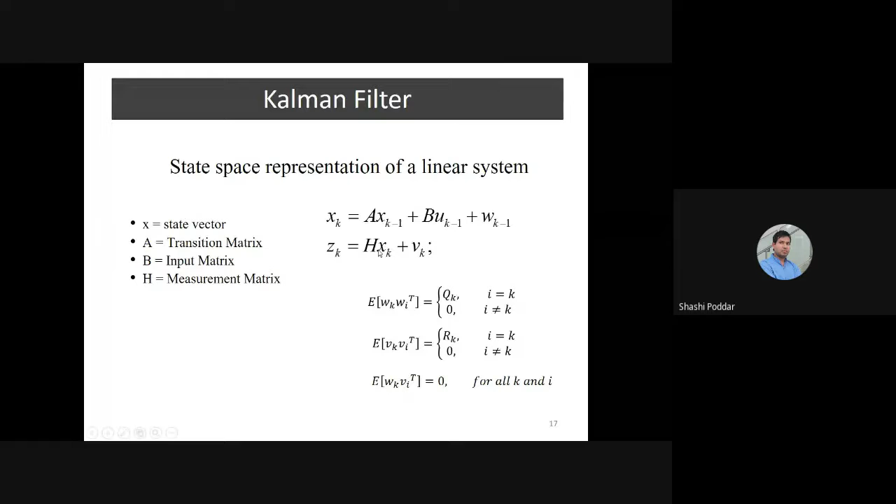So now let me explain the algorithm first. If suppose the error at any time instant can be represented as Xk minus Xk cap, then the error covariance of it can be represented as Pk, which is equal to the expectation of Xk minus Xk cap into Xk minus Xk cap transpose, and which is propagated in time to provide us Xk cap equal to Xk cap minus plus Kk times Zk minus Hk Xk. Zk minus Hk Xk is basically called the innovation part, or the error between the measurement, where Zk is the measurement, minus H times Xk cap minus.

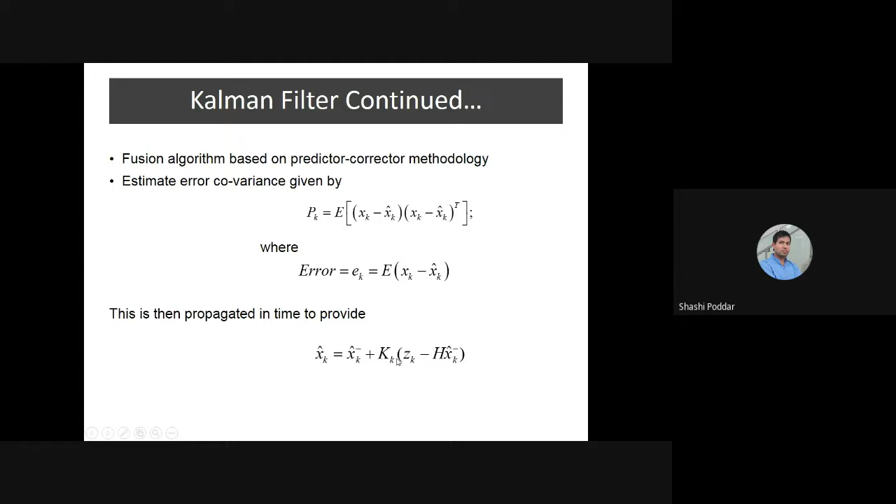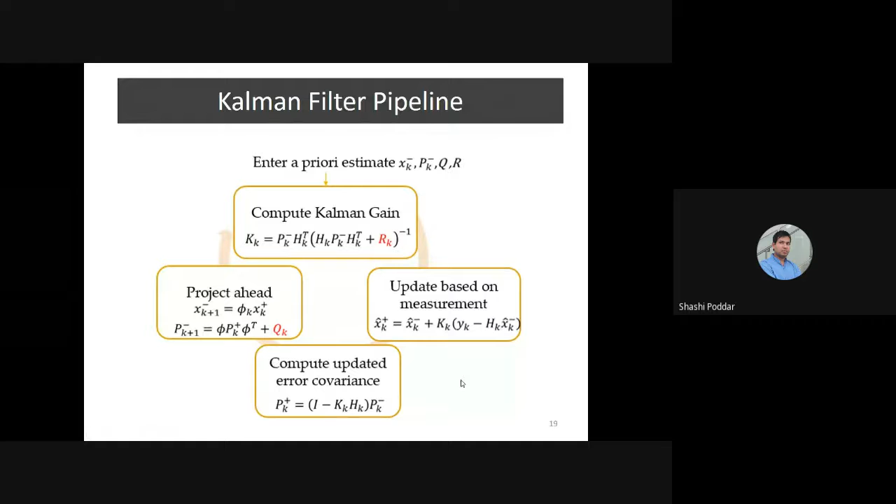This is the propagated part, this is the measurement part. Once we take an error of both of them, we keep adding errors at each time. The whole Kalman filter equations can be explained in 4 steps: first, project ahead, where we estimate the next time instant; then compute Kalman gain; then update the measurement; then compute the error covariance at each time instant. This keeps running at every time instant, giving a better estimate of any state. This is the estimation framework for a UAV or vehicle's attitude parameters via Euler angles.

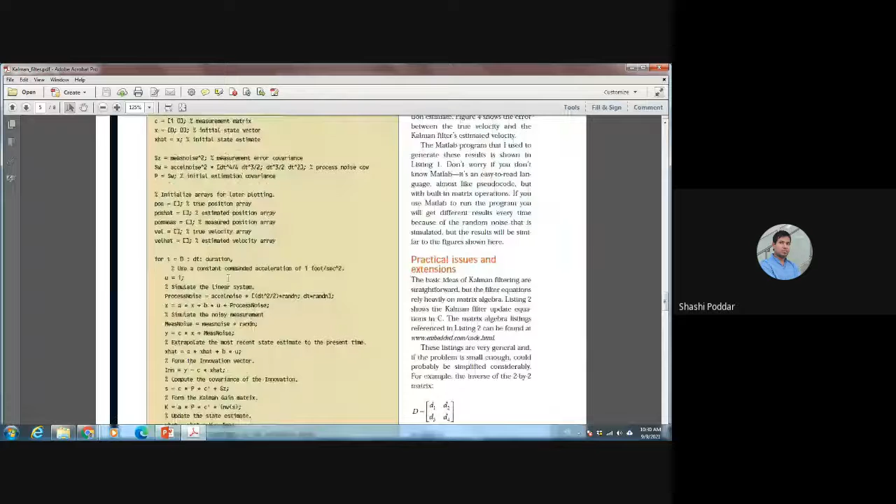Before going ahead, I'll introduce a small example of how the Kalman filter works for a position estimation system. I'll use this tutorial presentation by Dr. Dan Simon, who has written a very good book on Kalman filters.

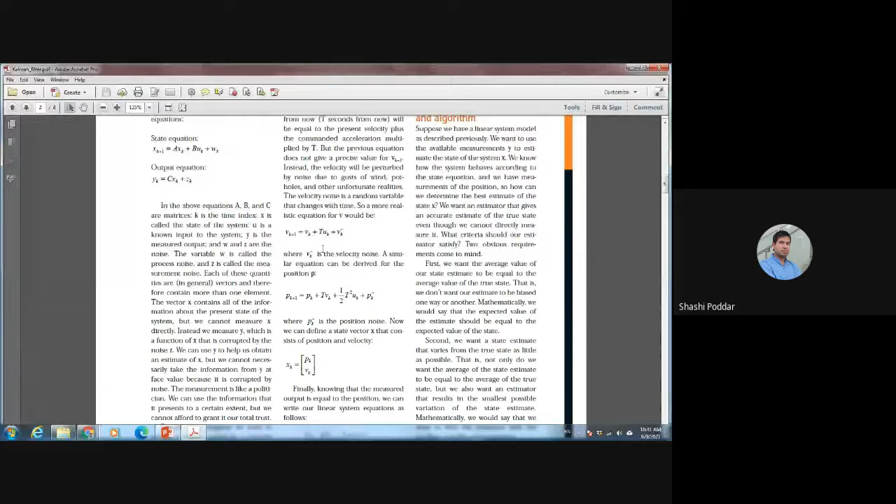He represents the system using a state equation and an output equation. Considering the velocity of an object, Vk+1 equals Vk plus t times uk, where uk is the acceleration and t is the time, or delta time. So acceleration times delta t is basically the velocity, and Vk tilde is noise. Similarly, position Pk+1 equals Pk plus delta t times Vk, where Vk is the velocity, plus half... this is the general physics equation of position and velocity.

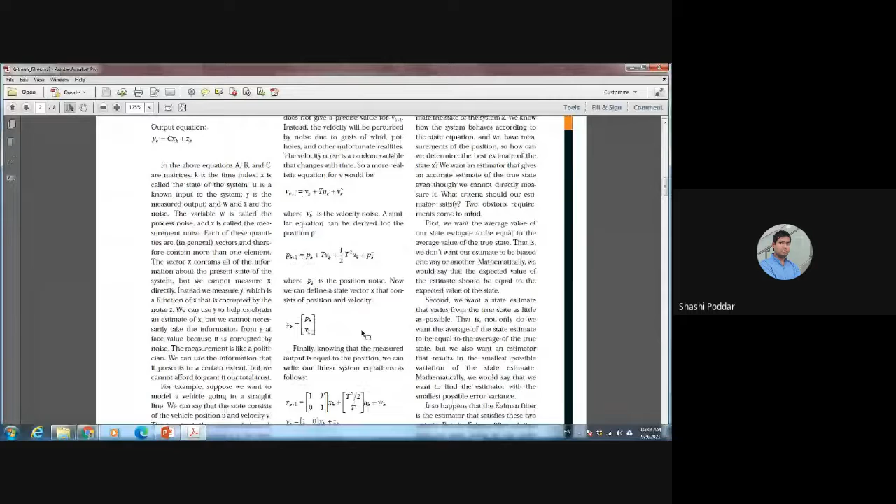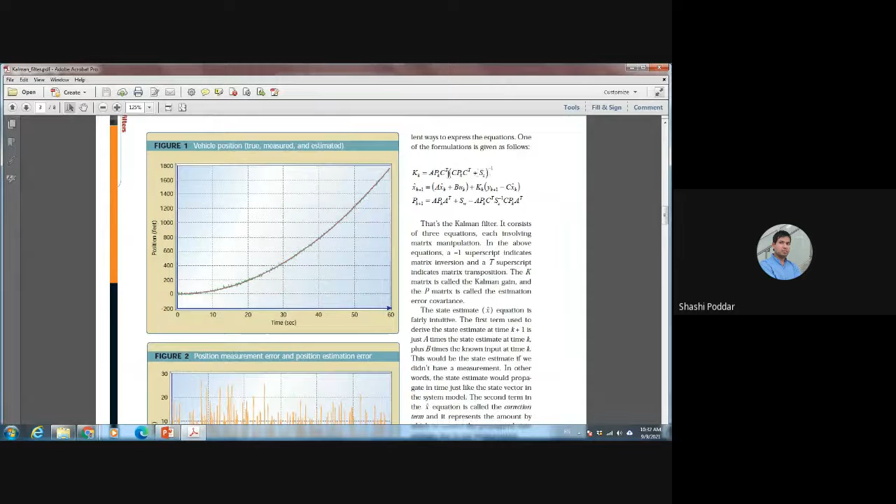Now if we apply the Kalman filter on this equation - the kk, xk+1, and pk+1 equations - we can keep estimating the position at every time instant.

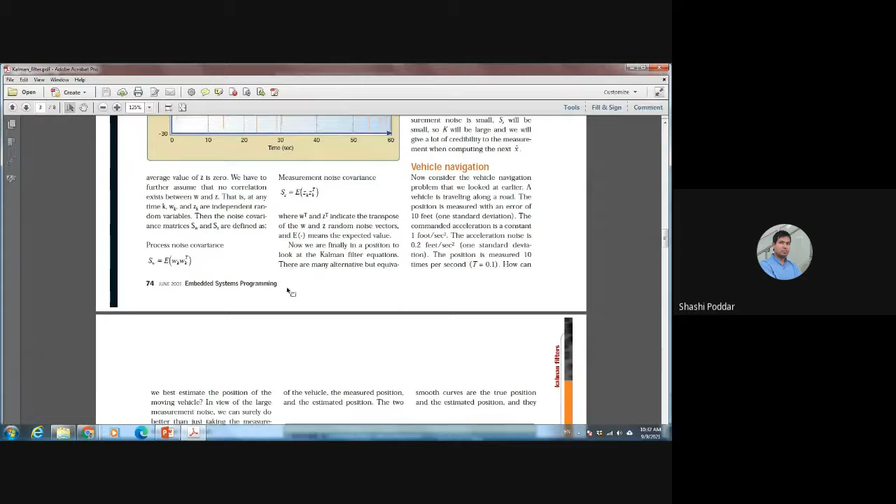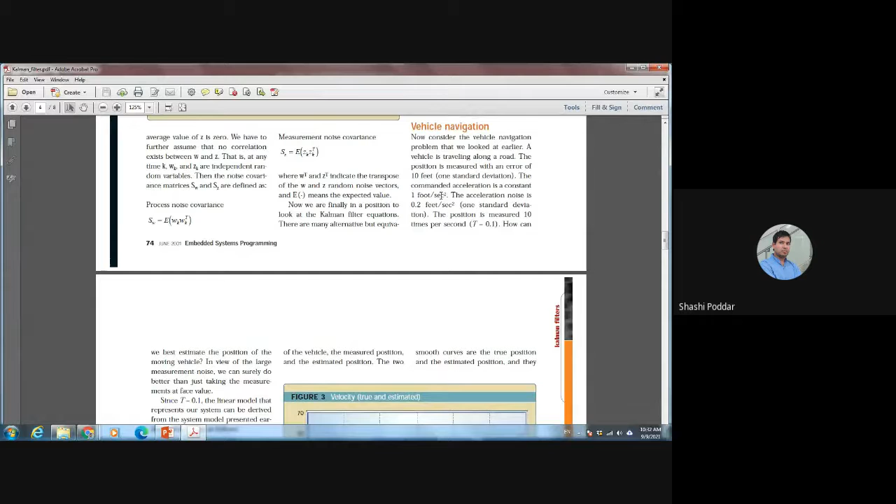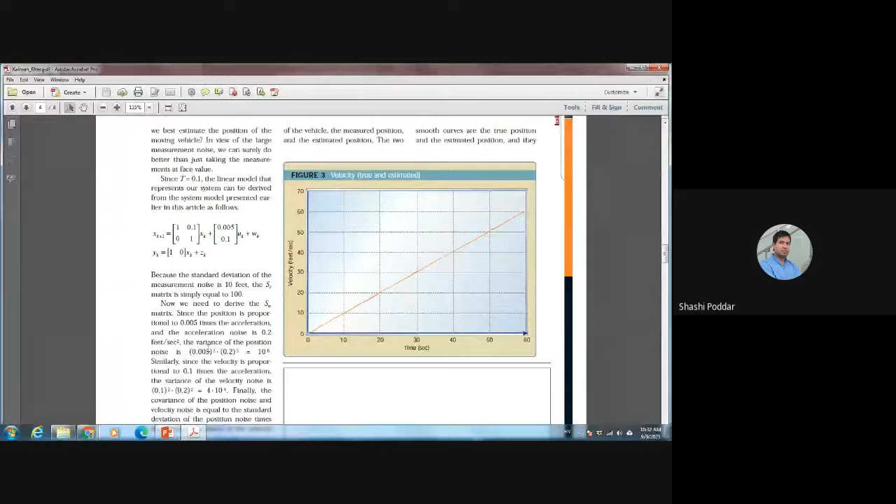This whole presentation or tutorial is available on the website. If we feed exact data, such as acceleration of 1 foot per second squared, acceleration noise of 0.2, and position values, we can get a real equation and simulate the system. Professor Dan Simon has provided the MATLAB equations for simulating this, and we can see the error as we change the acceleration noise or measurement noise parameters, and observe how a Kalman filter works.

Currently this system has been defined for a linear system. If we have a nonlinear system, we have what are called extended Kalman filters or unscented Kalman filters - but we won't go into much detail on that.

Now let's come back to the state estimation of a UAV or unmanned vehicle. Here, phi dot, theta dot, and psi dot are the orientation angles' derivatives, and the biases in all three are represented as BP, BQ, and BR. The derivative of the biases is represented as noise in this, and these equations are taken from Dynamics of Flight Stability and Control by Etkin and Reid.

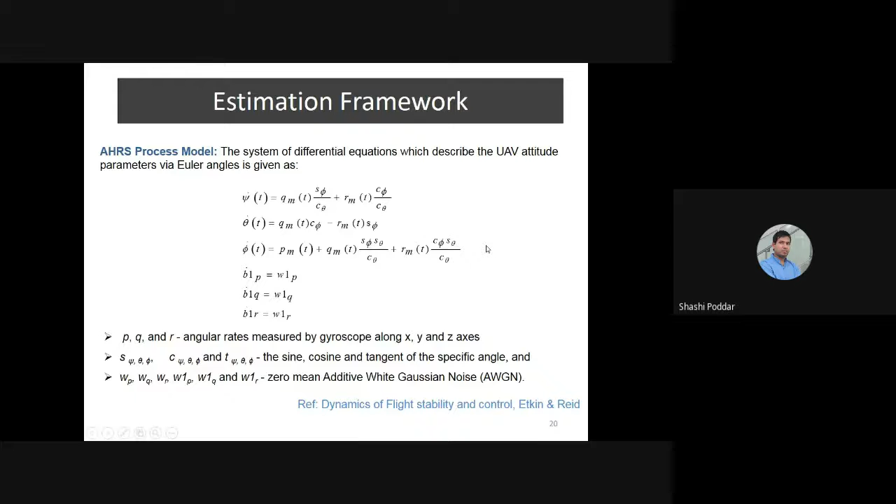Similarly, a measurement model is defined in this way, where we have the output from the accelerometer in all three axes, represented like this. So once we use the equations for the process model and measurement model for a simple position estimation system...

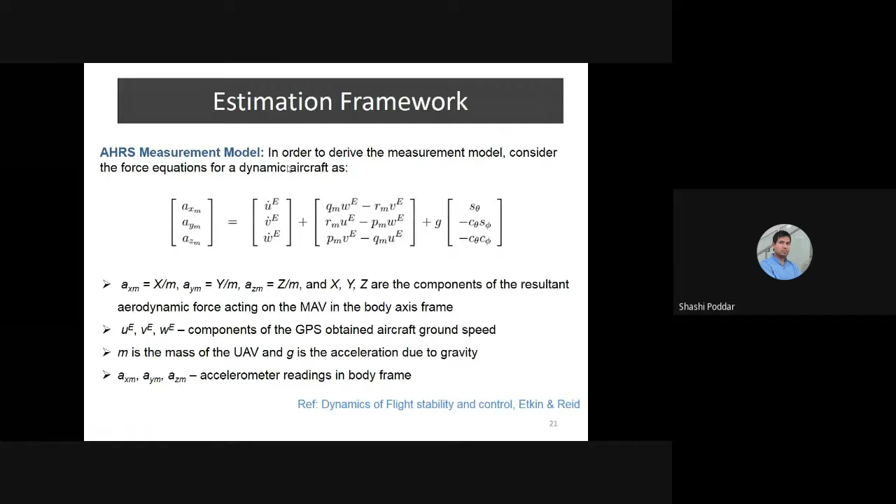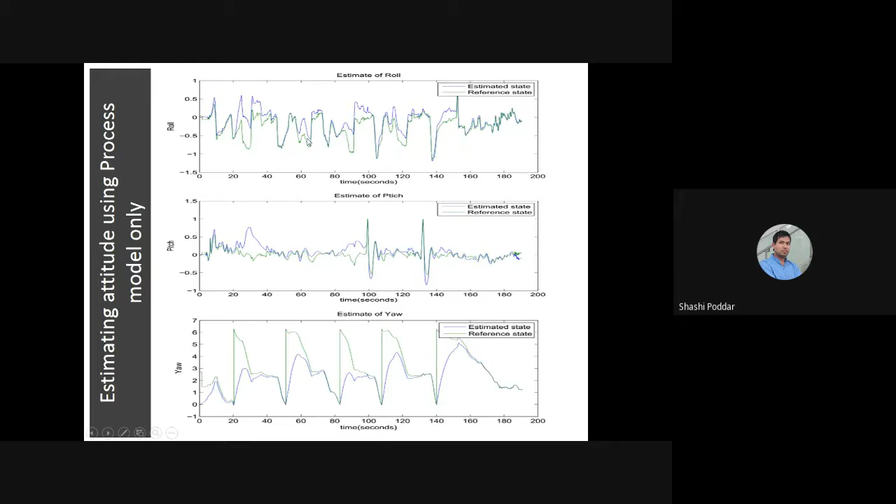Now what happens if we estimate an attitude using the process model alone? You can see that the reference, shown in green, and the estimated, shown in blue, are a little off - they're not completely following each other for roll, pitch, and yaw. Similarly, if we use the measurement model alone, the estimated and reference show a lot of noise.

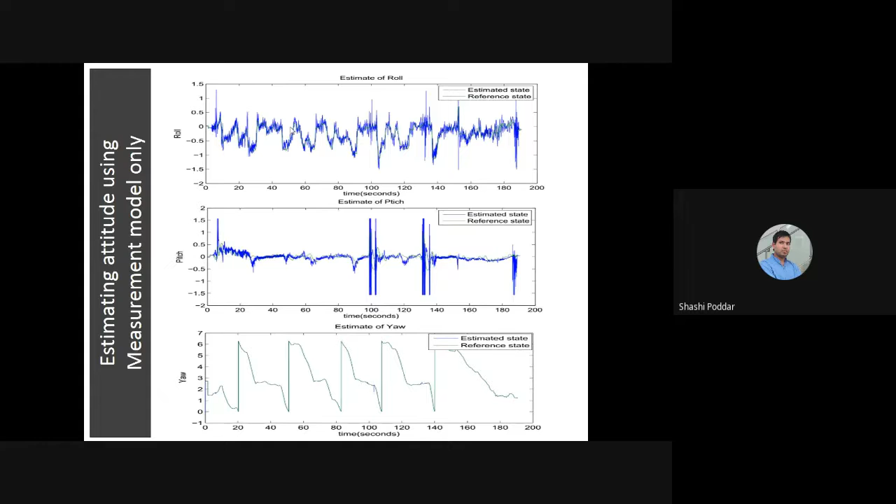Now, if we combine both of them using an extended Kalman filter, the output is much better than both of them. So this is just a small example of how an EKF or a Kalman filter helps us.

So now let's see the equations of the Kalman filter. It had basically xk plus, xk cap, Kalman gain kk, and error covariance. In all these three equations, there were two parameters, qk and rk, which had to be fed manually.

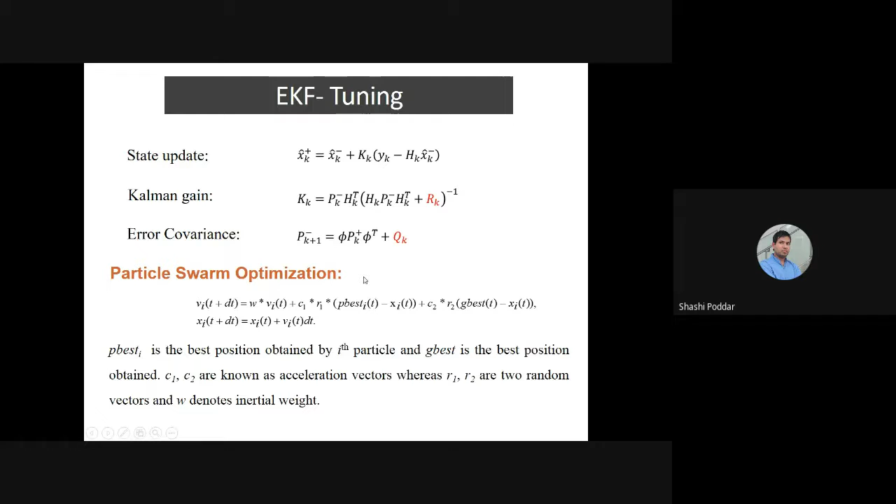So there were some researchers who did work on tuning Q and R automatically. Some people have used particle swarm optimization and other optimization techniques. One of my initial research works used a new optimization technique called human opinion dynamics, or HOD technique.

This basically works on the concept of opinions. So suppose there are 100 individuals in a room, and everybody has an opinion about something. Slowly, if they keep interacting with each other, their opinions will all converge to one opinion. This was the concept of human opinion dynamics.

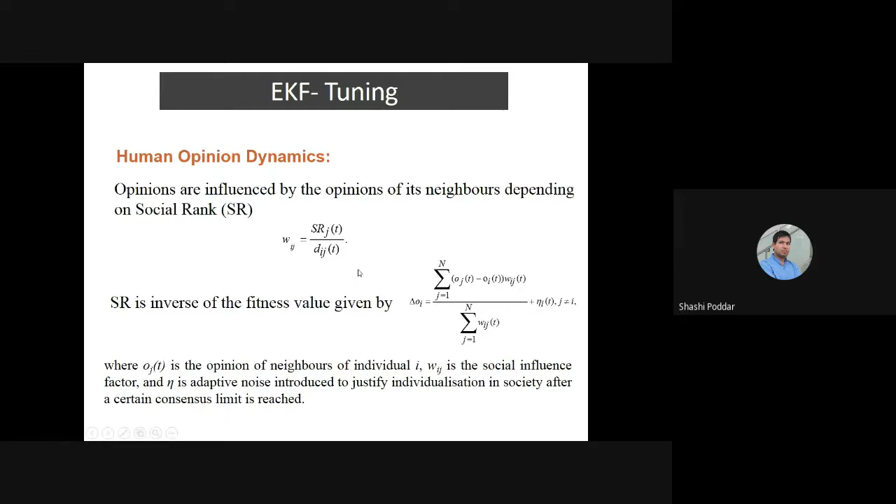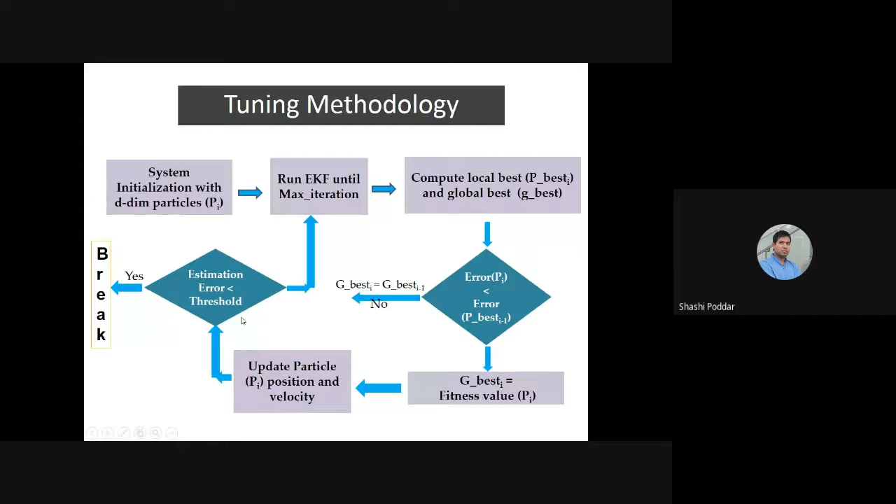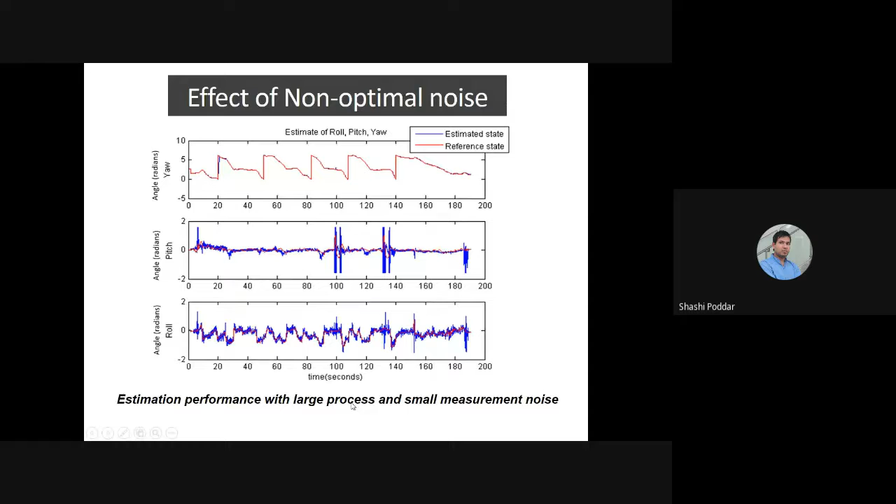I won't go into the mathematics of how human opinion dynamics works, but this technique was applied to obtain Q and R automatically once the estimation error reaches below a particular threshold. If we have non-optimal noise, a non-optimal Q and R, such as small process and large measurement noise, that is small Q and large R, we get this kind of estimation result. When we have large process and small measurement noise, we get this kind of result. But when we tune it using HOD, we get very good results, matching the reference.

Now, before going to the next slide, if anybody has any questions, we can take some questions on the tuning or anything on Kalman filters.

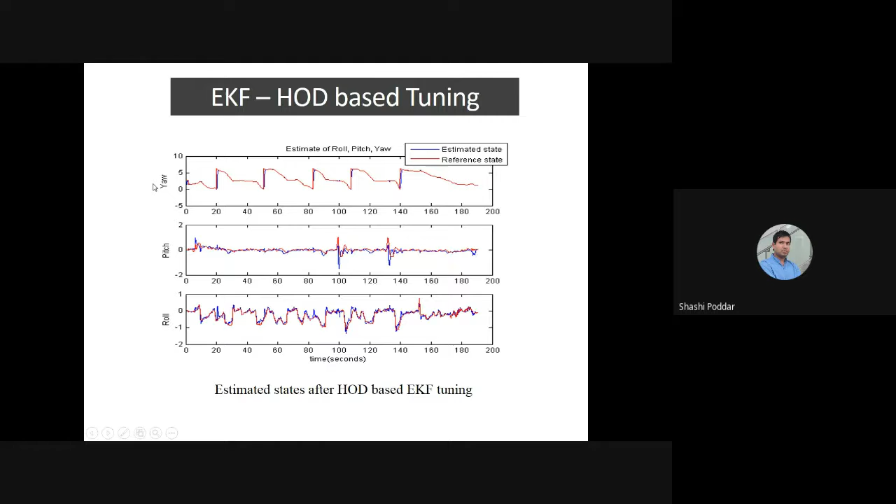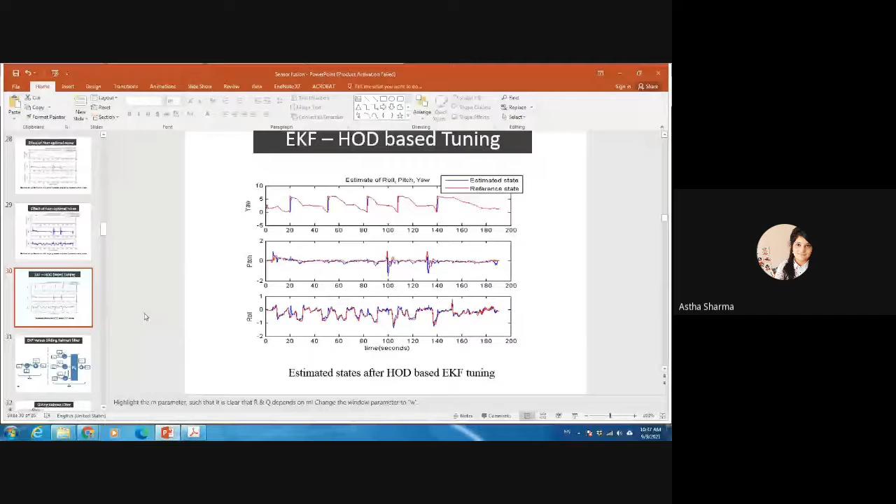There's a request in the chat box asking the speaker to deliver slowly. Someone says they can't follow the slides. The speaker agrees to slow down and asks if there's anything else. Participants are invited to unmute themselves if they want to interact directly with the speaker about any query or concept they missed.

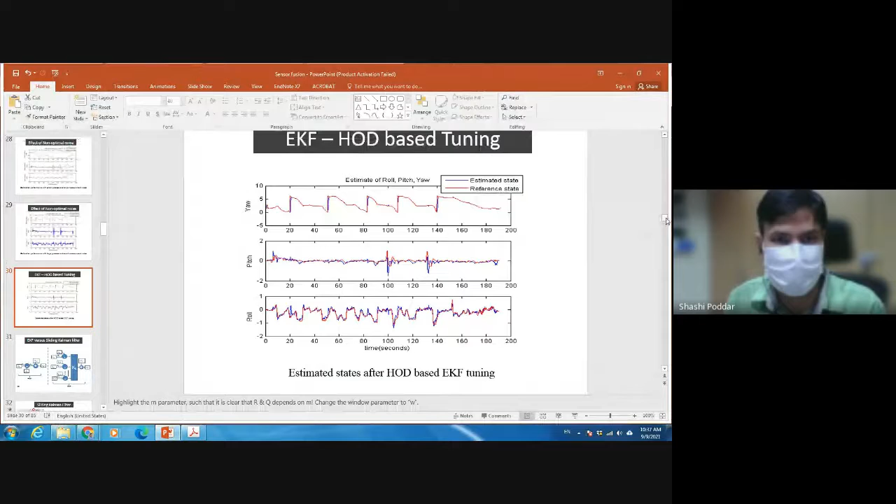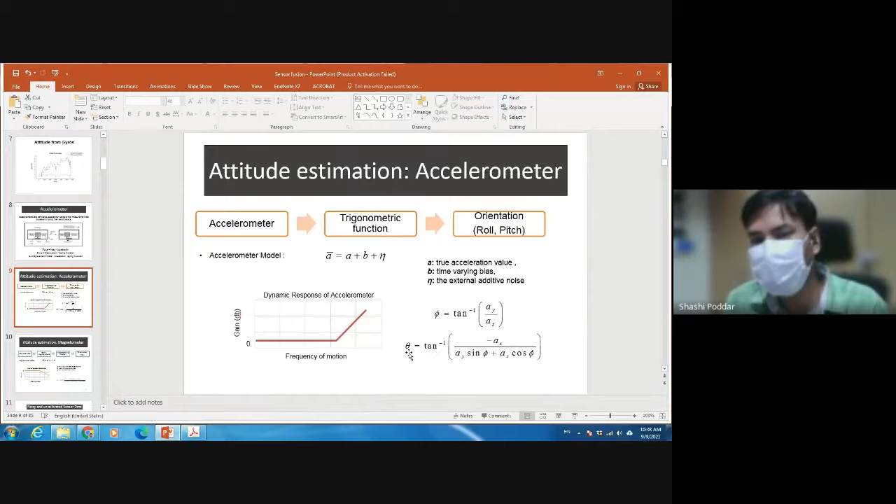Someone asks what was covered after gyroscope, in the two slides missed. After gyroscope, the speaker introduced the accelerometer and magnetometer, covering attitude estimation using gyroscope, then attitude estimation using accelerometer, which estimates the phi and theta angles. Using magnetometer, we can estimate psi. So there are three angles: phi, theta, and psi. Phi and theta can be estimated using accelerometer, psi can be estimated using magnetometer, and phi dot, theta dot, and psi dot can be estimated using gyroscope. If we take an integration of all three angles, we can fuse them together with the output from accelerometer and magnetometer in a Kalman filter setup.

Is that fine? Yes sir, definitely. Okay, please continue.

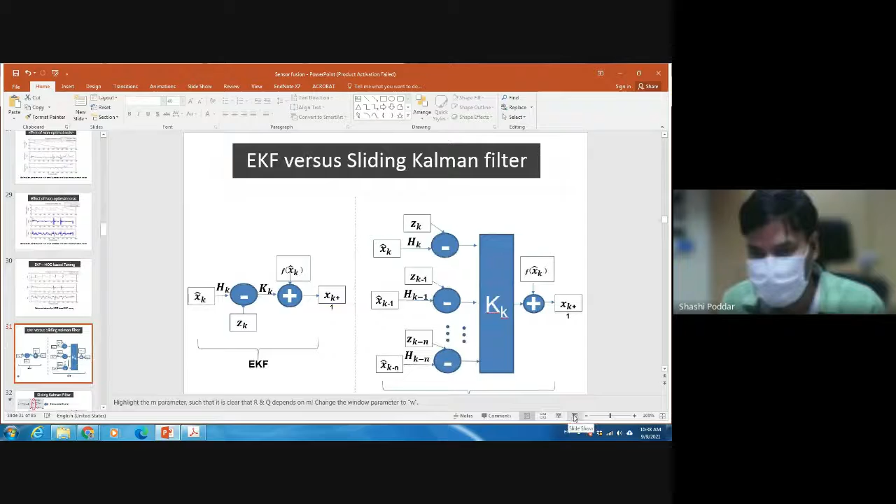Now let me switch to the next part of my presentation, the sliding Kalman filter. Until now we saw how an extended Kalman filter works: it takes the input xk cap, multiplies by hk, takes a measurement, and uses Kalman gain kk to yield xk plus, which is the post next state estimate. This is the part of a simple Kalman filter.

When we have a sliding Kalman filter, we have xk cap, xk cap minus 1, up to xk cap minus n, a window of past n states combined together to yield a better state estimate. This is the sliding Kalman filter. The advantage is that if you have information from just the previous state estimate, that's good, but if you also have some idea about what happened even earlier, you can use all that information together to give an even better estimate.

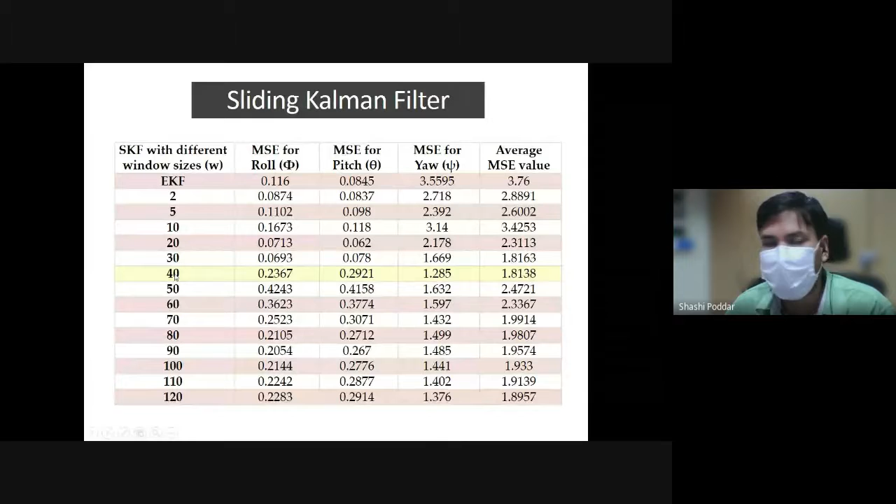After doing some simulation for sliding Kalman filter with different window sizes, we found that different window sizes give different MSE, or mean square error, values. Taking all three angles, we found a window size of 40 gave good results. But how will a system understand whether 40 is good or 25 is good? Because this keeps changing based on the dataset.

There was also a concept of innovation adaptive estimation, or adaptive Kalman filter. In this, we obtain the Q and R values automatically. Here too we try to have a theoretical covariance CVK and a practical covariance C-cap-VK, computed using a window of past error. So the question was again the same: can we actually change the size of this window?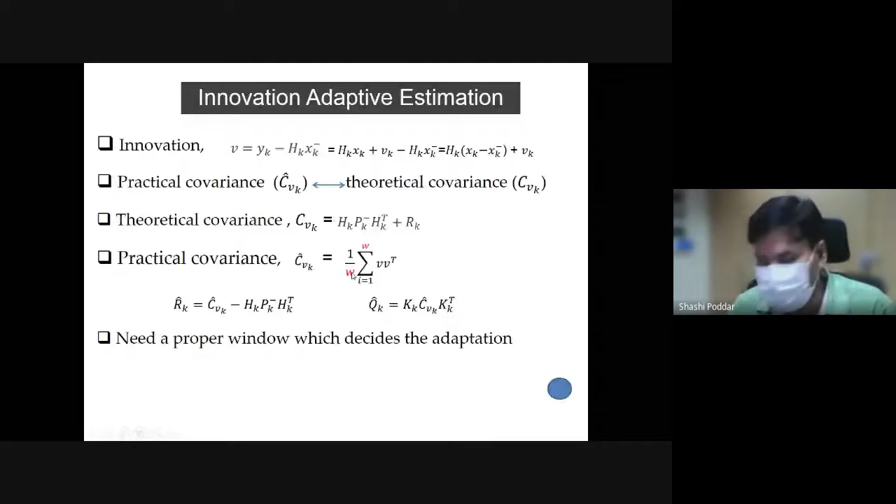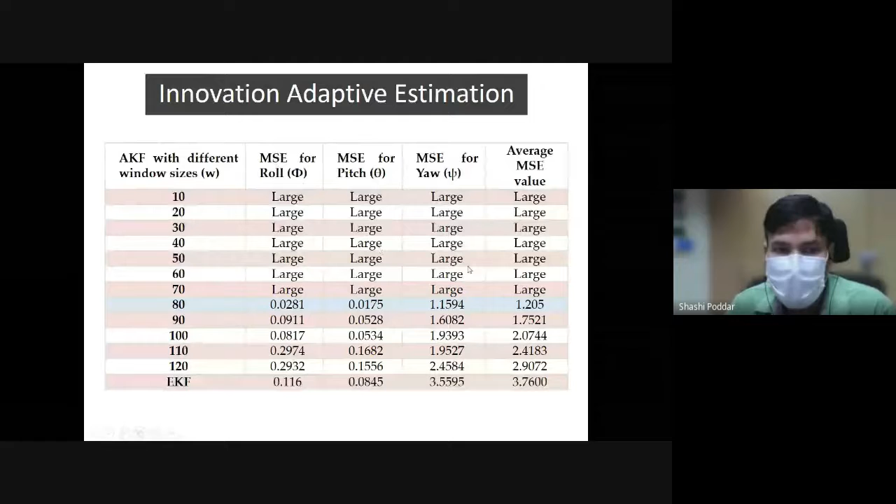We did some simulation of adaptive Kalman filter with different window sizes. For small window sizes, the mean square error was very high. For a window size of 80, the results seemed much better. This was the result of adaptive Kalman filter, or IAE, with a sliding window size of 80.

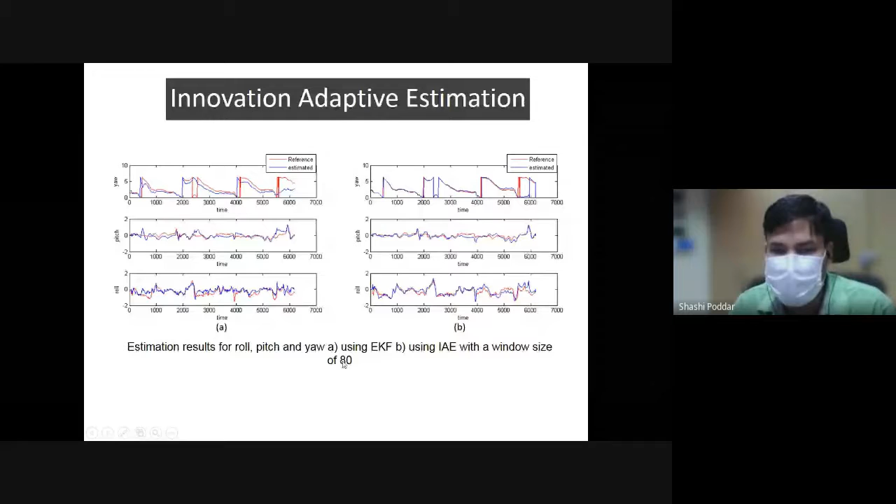So then, how about having an adaptive plus sliding Kalman filter, SKF plus AKF? This combination yielded good accuracies, but again had the limitation that we had to select the window size on our own.

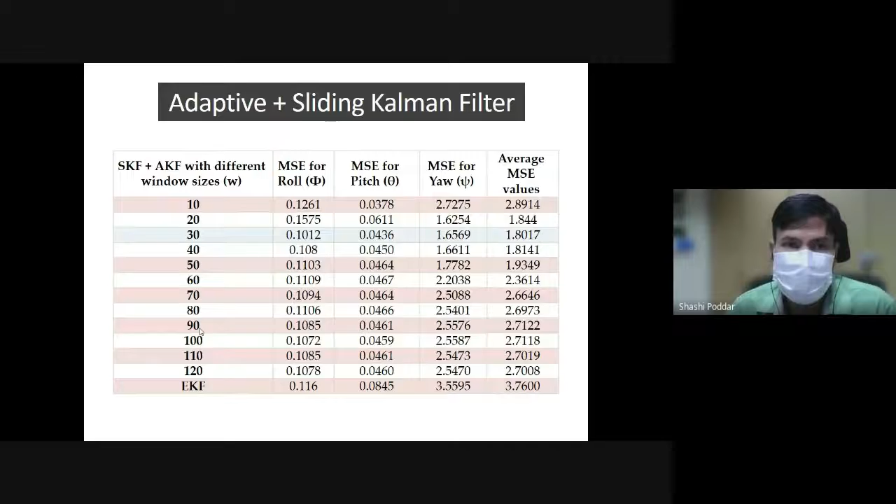So then we came up with the concept of change point detection. This is something like: if you have a data stream coming in, and we can automatically detect when a change has occurred in the data, we can send that point to the algorithm, and accordingly n will get flipped over there.

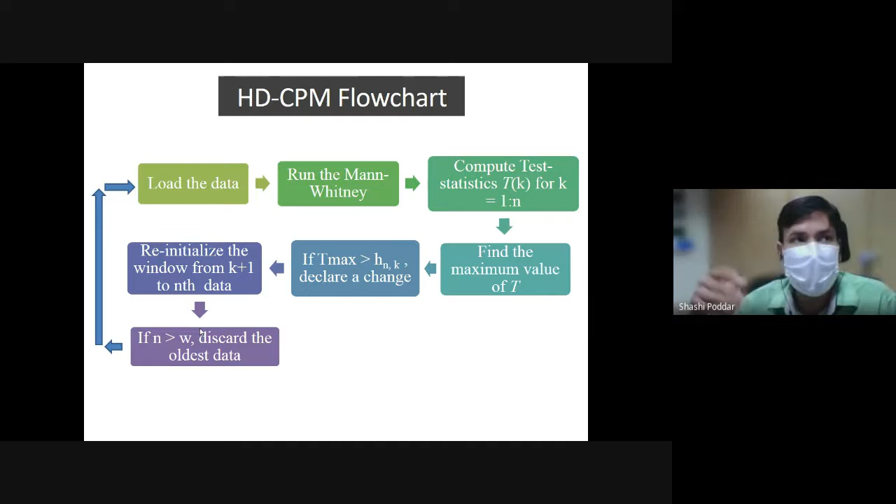I researched different kinds of change point detection and used a particular technique called HDCPM, change point monitoring, proposed by Hawkins and Deng. His framework ran a Mann-Whitney test and reinitialized data. When we applied HDCPM, the algorithm still wasn't working fine.

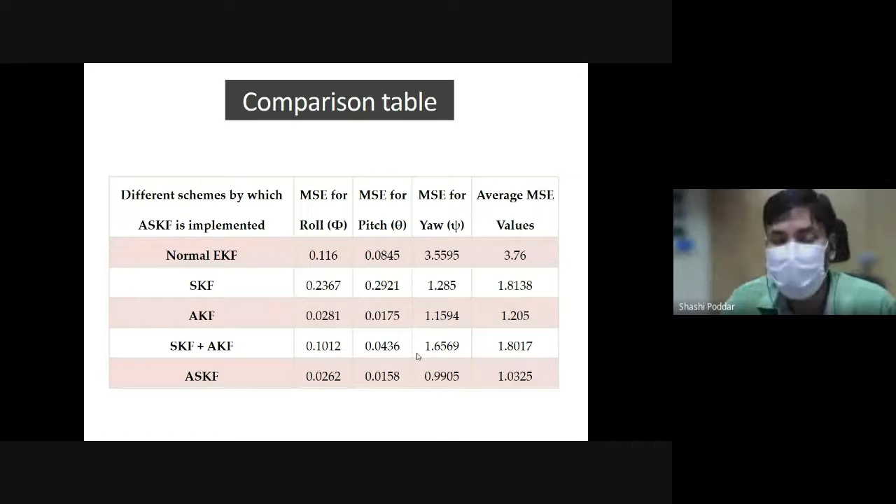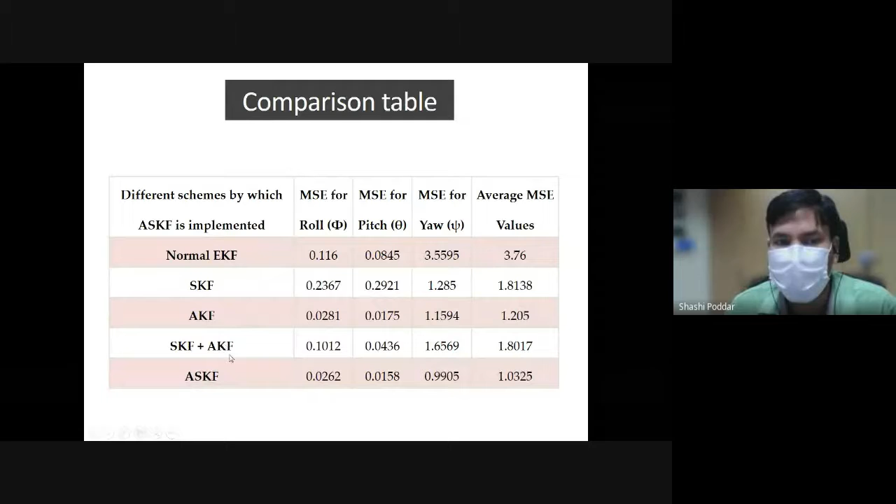So we had to apply some pre-whitening in the data, because the data was auto-correlated among itself. In order to remove the auto-correlation, we did pre-whitening, and then the concept of ASKF evolved, yielding very good accuracy in the output - better than normal SKF, adaptive Kalman filter, or the combination of SKF plus AKF. The output of ASKF is also shown here.

You can see visually it is much better than either the adaptive Kalman filter, sliding Kalman filter, or normal EKF. So now from here onwards...

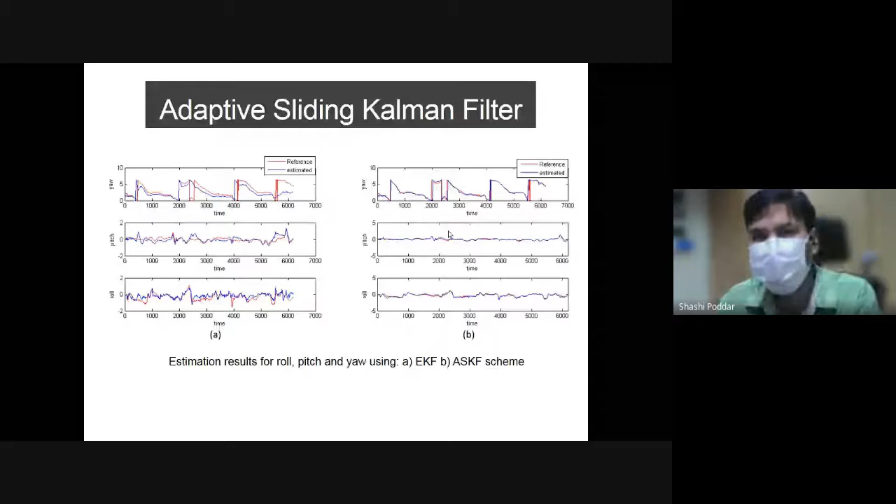We're working on another concept, the complementary filter. Complementary filter is a comparatively simpler approach - you just directly pass the output of the accelerometer to a low pass filter, the output of the gyroscope to a high pass filter, and combine them together.

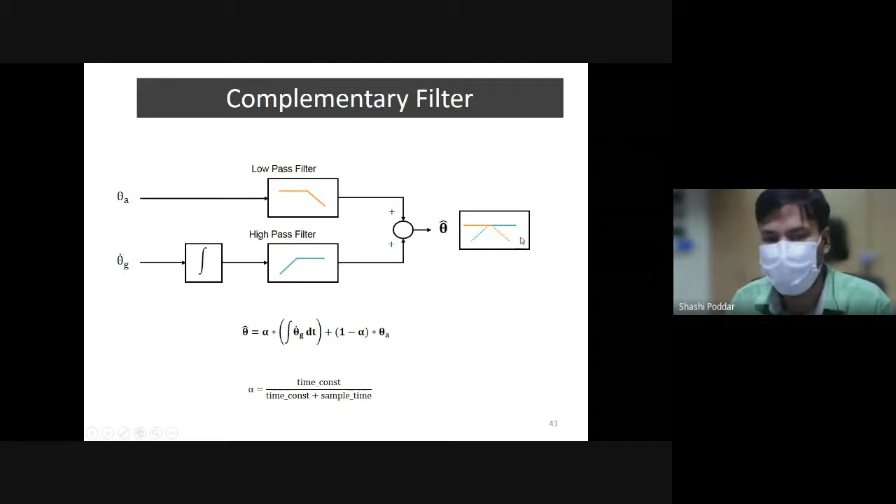This is the concept of a simple, or linear, complementary filter. Mahony, Madgwick, and several other researchers came up with the idea of a nonlinear complementary filter, which had two parameters, Kp and Ki, fed manually. Since I was already working on adaptation of different Kalman filters, we thought: how about adapting these parameters of the complementary filter?

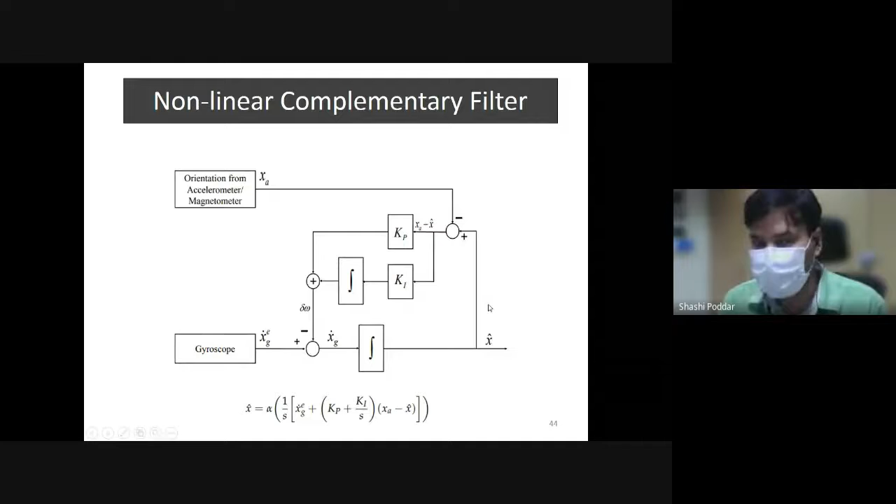We then applied particle swarm optimization to adapt the Kp and Ki. Some researchers had already worked on applying fuzzy logic to adapt this Kp and Ki.

The application of evolutionary optimization technique was very new in this area, and it yielded good results. This is the kind of algorithm structure that we followed.

We waited until 30 readings, applied PSO on the average of the last 30 errors, and basically populated the whole framework using different Kp and Ki possible parameter values. Once the error value reached a particular threshold, we stopped the algorithm, saying that the PSO has now found the suitable Kp and Ki parameters.

The results were like, if we have different Kp, Ki values, we had different average RMS values. But if we apply PNCF, that is PSO added nonlinear complementary filter, the output was even better. That is 0.07 here, 0.04 here. It is much better than either of any combination of Kp and Ki.

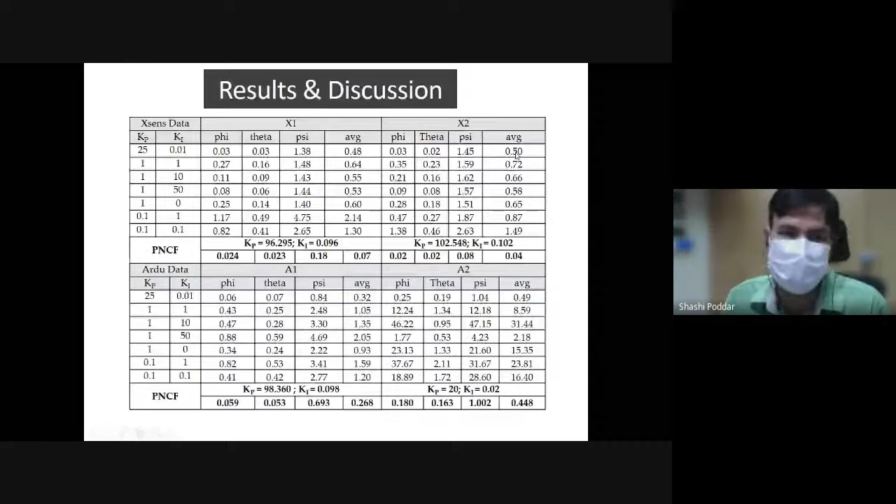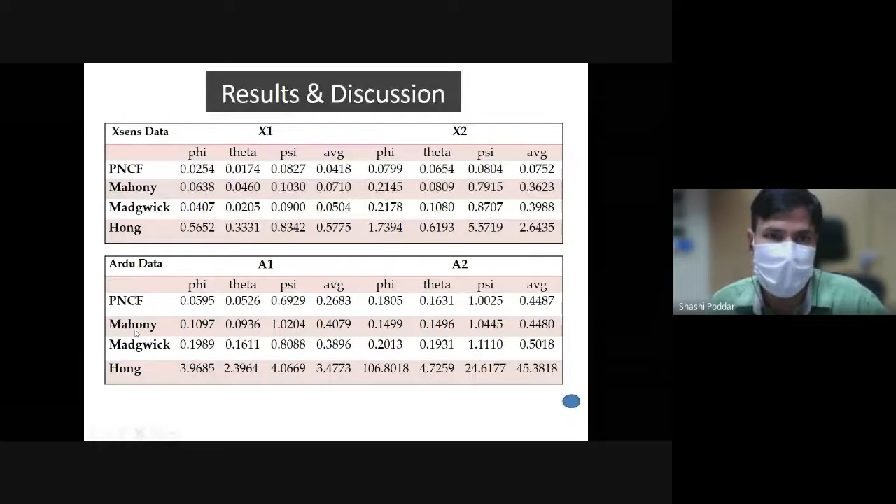These results we compared with different other algorithms, that is Mahony, Madgwick, and Hong. Hong was a paper which applied fuzzy logics. This was also compared on two different kinds of datasets, that is Xsens and ArduCopter dataset. Xsens is a very good sensor suite provided by the Xsens company, and ArduCopter is another sensor suite which has accelerometer, gyros, and magnetometer on one unit. So we had these two datasets generated in our lab, and accordingly we were able to achieve good results in this case. This is the kind of results for all four.

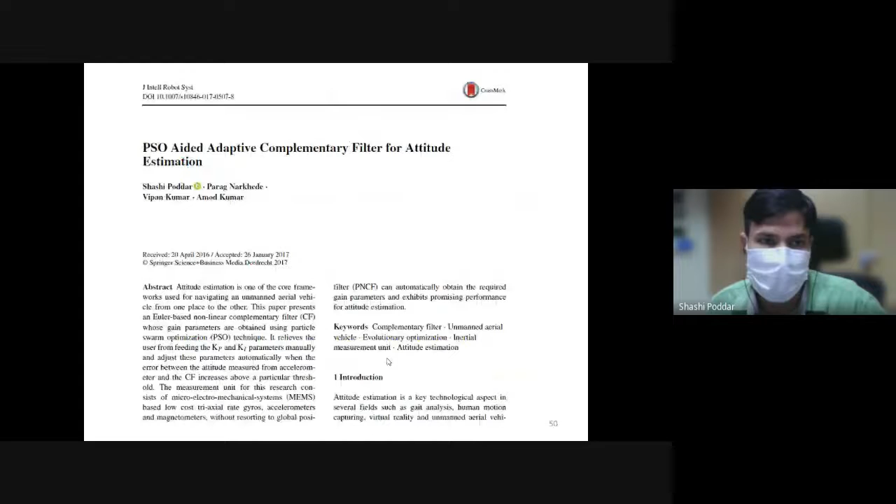You can see that all of them seem similar. It is just that when we see the error part, we can actually realize how much is the difference between all of them. So this was published in Intelligent and Robotic Systems.

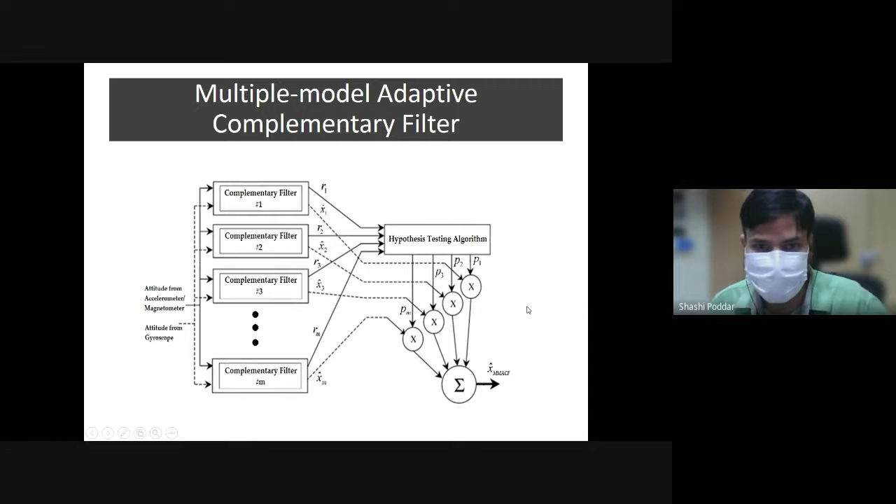Then we also came up with the concept of multiple model adaptive complementary filter, in which we had stacks of complementary filters with different kinds of window size, or different parameters in each of them. So once we had different parameters coming with different Kp, Ki's, we combined them together probabilistically in an MMACF or MMAE framework and yielded an output, which was again published. And the output is visually much better than the other, which is without any adaptation.

But before going to that, if anybody has any questions until now, please tell me. We can take up those questions before going to the next part of the presentation.

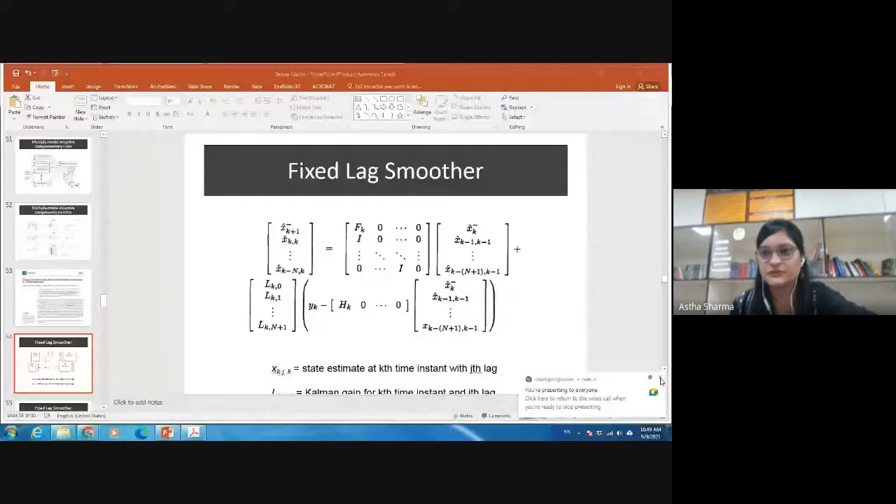Okay sir, I have a query. You are showing your innovative algorithm where instead of that theoretical covariance, you are setting up a practical covariance set, right? So how are you deciding the threshold for your algorithm?

The threshold basically we are deciding depending on the empirical results that we want to achieve. All the algorithms have a set threshold limit beyond which even if you keep iterating, the systems will not perform better. So we basically keep experimenting, and on the basis of that, we arrive at those threshold values.

Okay. Because you can also throw some light, if some participants would like to work on this topic and want to set up their own experiment on sensors and apply this algorithm, then what would you advise them?

See, students or anybody who wants to work on inertial sensors, nowadays I guess MATLAB also has some data generation setup, and some algorithms are already available online. So one can start directly from there, implement an already existing algorithm, and then start reading some literature. If any help is needed on any particular algorithm implementation, I can help them out with any information needed.

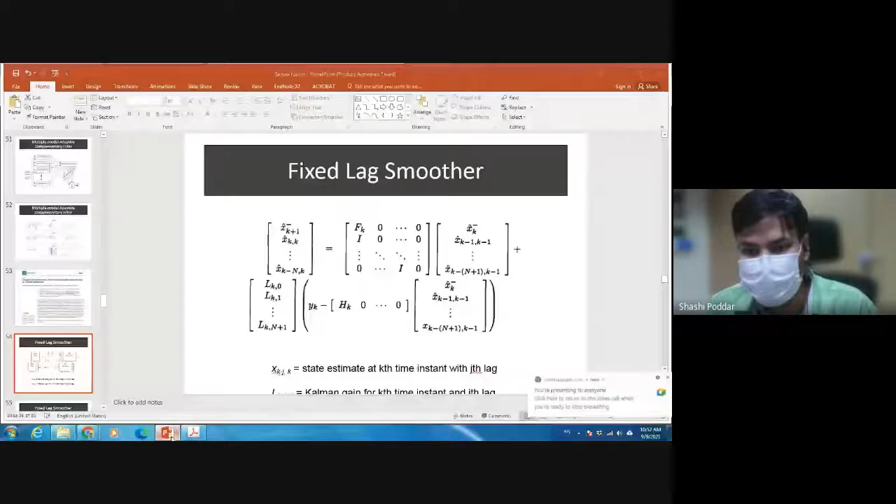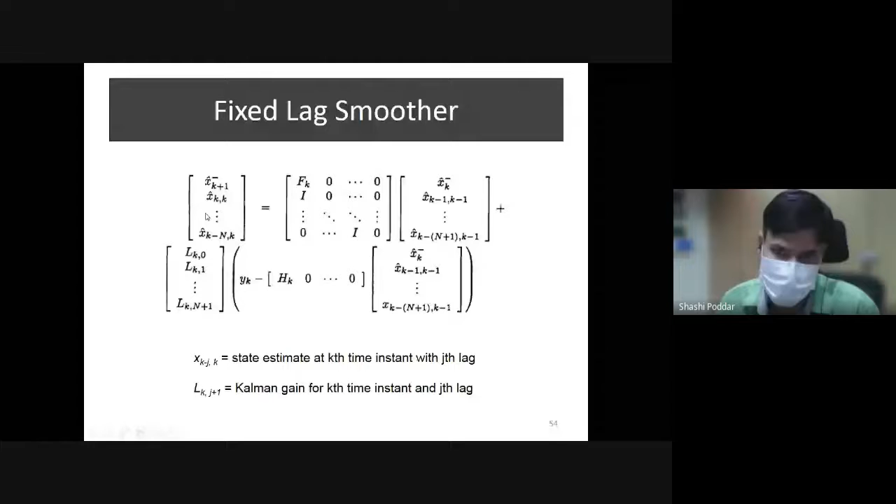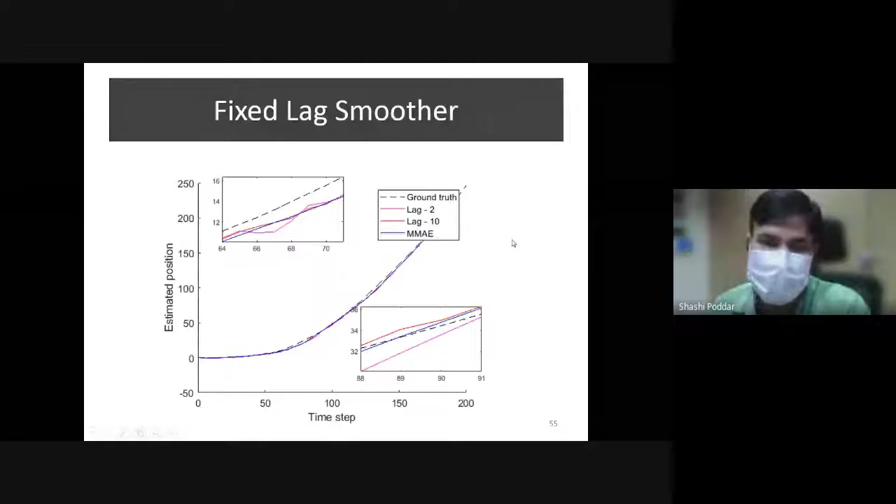So the idea was whether we can combine them all together, that is, combining different lagged outputs to yield a good estimation accuracy. So we applied an MMAE-based adaptive lag smoother, and we obtained the results of MMAE with respect to the normal lags, and this was the output with respect to error covariance matrix values. This particular simulation result is currently under publication, probably under review, and should be out by some time.

So now we will switch to vision-based navigation. As I told during the initial presentation, for any system to work in an indoor, underground, or extraterrestrial kind of setup, in those cases we do not have GPS signals, but we have cameras. So cameras can be used for estimation of navigation parameters.

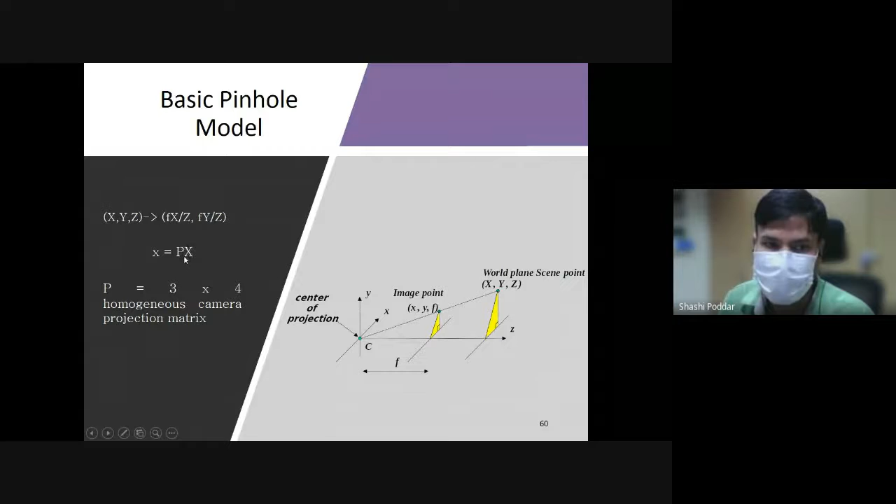So now there are different kinds of feature detectors. Some of them are single scale detectors, which were proposed initially in the 90s.

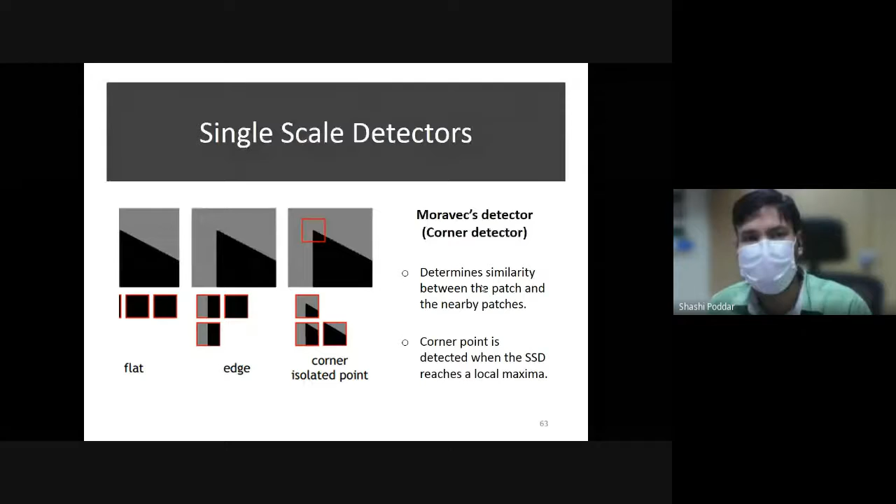Basically single scale detectors like Moravec, then Harris corner detector, and several other corner detectors. But these detectors were not able to work on different scales. That is, if a car is bigger in one image and the same car gets smaller in a few more images, then that same car will not be detected by the single scale detector. So we needed multi-scale detectors.

So there came a concept of SIFT. SIFT was proposed in 2004 by Lowe, and since then several other feature descriptors and detectors have come into the market, like SURF, BRIEF, ORB, and several others. What happens here is we have different scales of images which are combined together to yield a histogram of orientations. I'll not go into the detail of how a feature descriptor is made, but for the purpose of representation, I can say it will give us an output of a particular point in terms of a vector, which is unique to that particular point.

So there are also different kinds of feature matching techniques. There is exhaustive search, there are hashing techniques, there are nearest neighbor techniques. I'll not go into this.

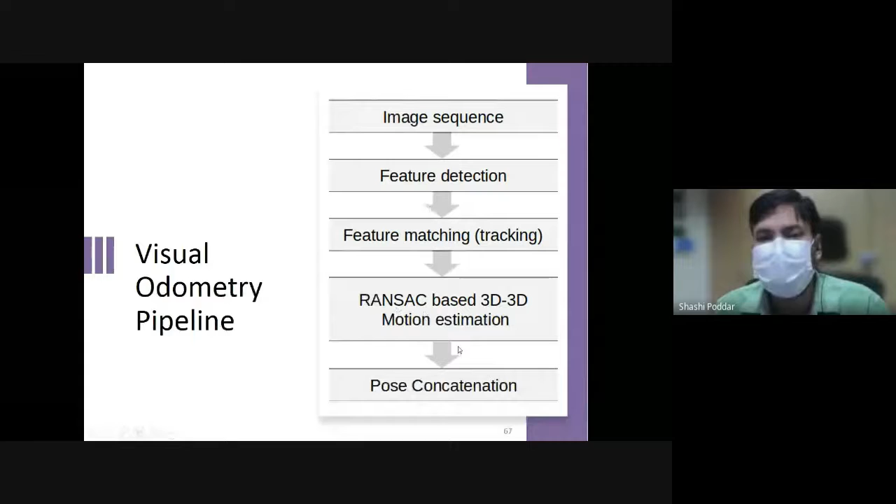So the whole pipeline can be described in this way: we have images coming up, feature detection, feature matching, RANSAC-based 3D-3D motion estimation, pose concatenation. Let's see how each of them perform.

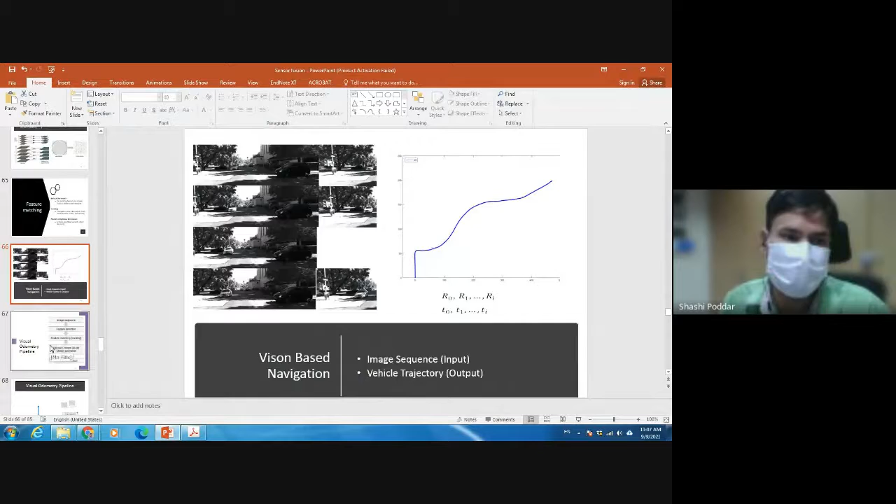So fine, what I was telling is that with the help of images we can actually estimate the pose information, that is the rotation and translation of the car or any vehicle which is moving. Now how do we do that? This is a big pipeline: we take the images, detect the features, do some feature matching, apply RANSAC-based 3D-3D motion estimation, and pose concatenation.

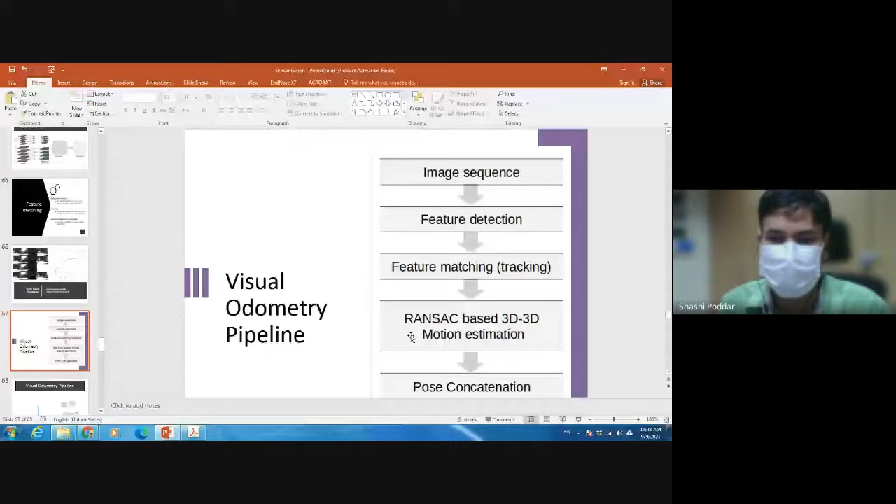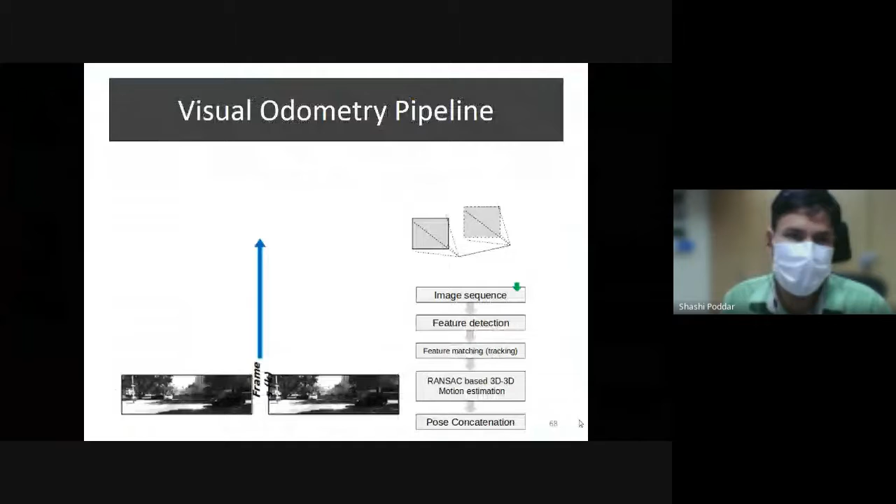So let's discuss how we do that. Once we have the output from the images, that is left and right images at different time instants, we can detect the features first. Once the features are detected, you can see they are detected at the corner of the car, on the back side of the car, on the trees and the poles, and on this car.

Now the same features are also detected on this particular image. How do we do matching? There are different techniques of doing feature matching, but you can see that there are at times outliers or mismatches. This point of the tree is matched to the top of the car. This point in the electric pole is matched to the electric pole. So how do we remove outliers?

One technique to remove outliers is basically the epipolar constraint. I'm not going into detail of how the constraint works. So now once intra-frame matching is done, we also do inter-frame matching. But you can see outliers again—a portion of the tree is matched to the shade of the same tree. So we also need to remove these outliers. There are different techniques of removing these outliers again.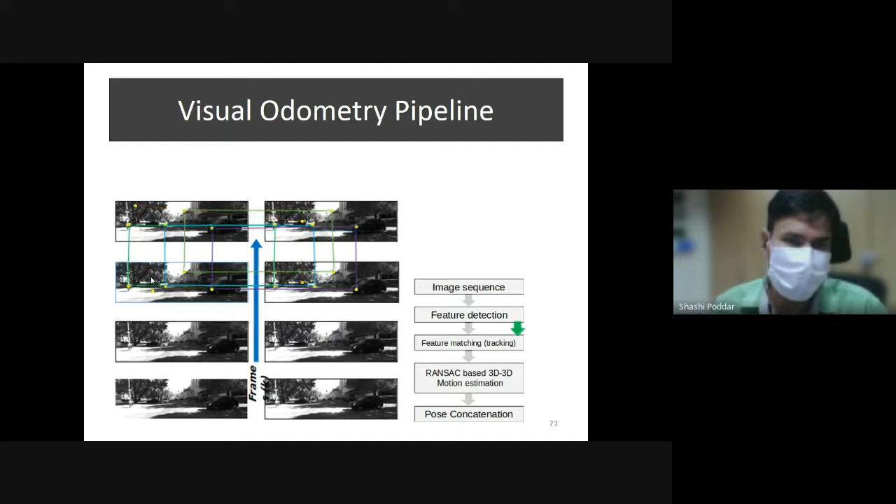Once these outliers are removed, we have perfect matching in all four images. These matches are then basically triangulated, that is the image points in the left and right are triangulated for the first frame and same for the second frame. Now you see we have 3D point clouds of the previous time instant and the current time instant.

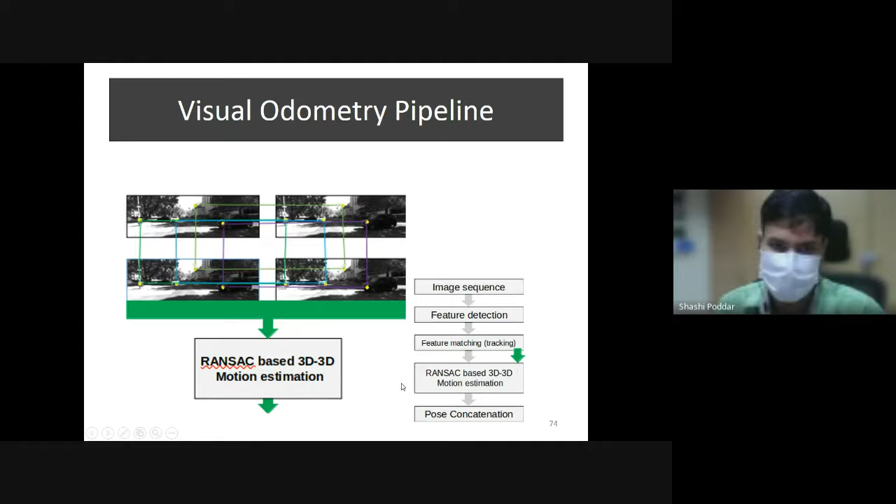These 3D point clouds are basically sent to different techniques of estimating motion out of them. One of them is RANSAC-based 3D-3D motion estimation. Let me explain how that works in a few steps.

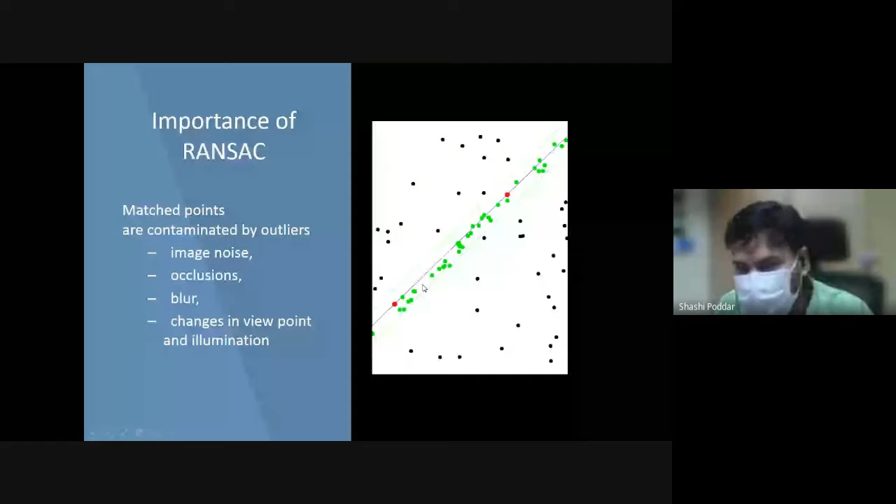Now suppose you have 2 points here, the target is to obtain the best line that matches these points. So we can randomly select 2 points and draw a line out of this, and we see how many points are basically falling near to it, and we calculate distance. We do the same thing with two other random points, and two other random points again. One time will come when we select the two points which fit the maximum number of points—this is the perfect, or most suitable, line for these particular points.

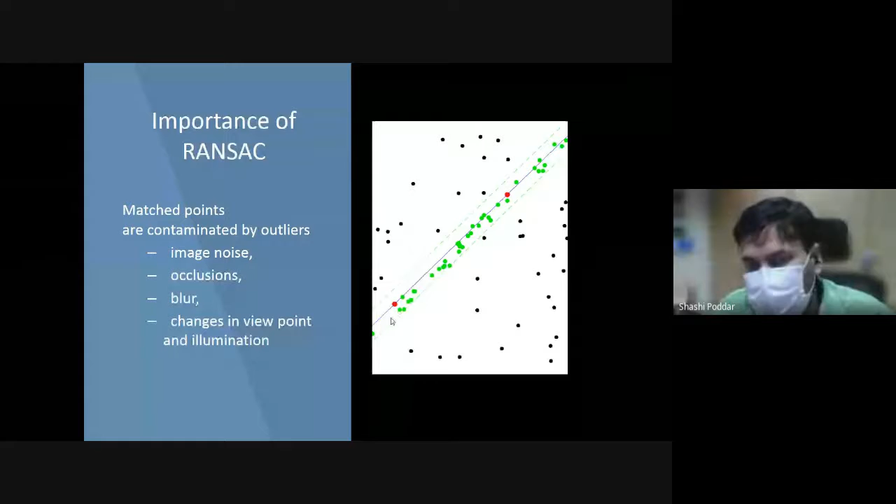So this kind of algorithm is currently for 2 points, whereas for rotation and translation we have 6 parameters: 3 for rotation and 3 for translation. We do this with the help of the algorithm to estimate the best fit using several iterations.

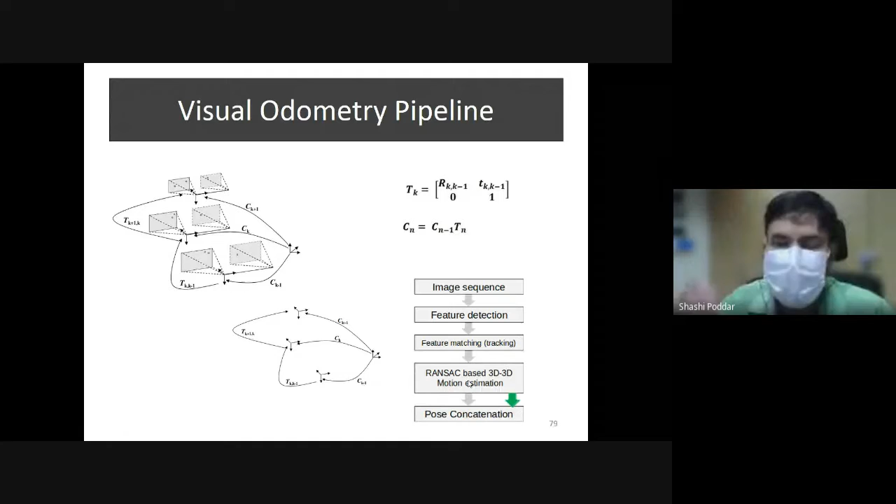So once you obtain this rotation and translation, that is the transformation parameters, we then concatenate these poses together. Once the pose concatenation is done, there are several algorithms by which we do pose refinement also, and we obtain an output of this kind.

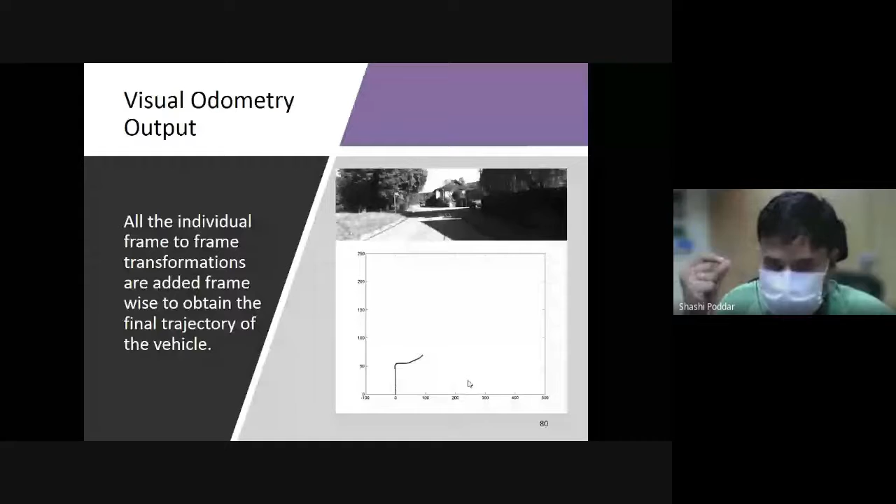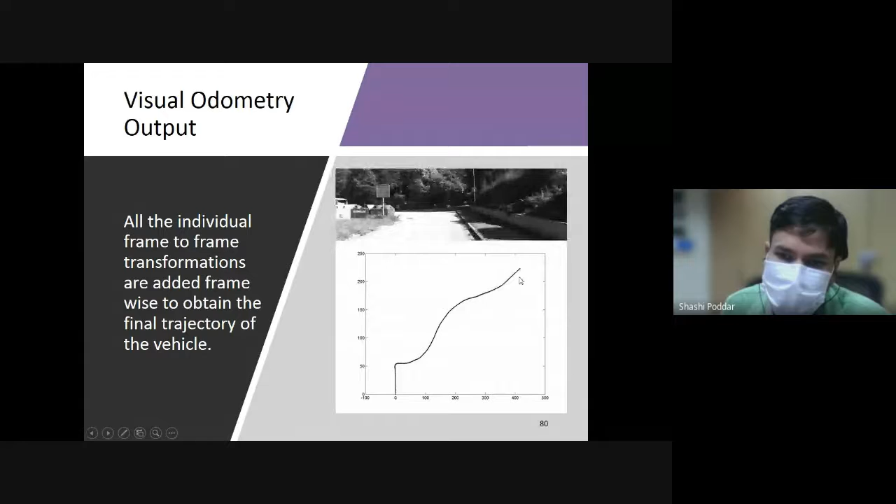This is the output of basically a KITTI dataset, like a self-driving car. In this case the camera is mounted over the car, and as we keep moving, you can see the pose graph here, or the path taken by the vehicle. It keeps changing. This is currently in a 2D framework, but it can also be represented in 3D.

So once we did several works related to improvement in the VO pipeline, one of them was reducing the feature length. Some of them involved use of inertial. The recent work that we did was use of mutual information to reduce the number of features that are sent to the whole VO pipeline.

So what happens is, suppose you have 100 features, and if it is sent to a pipeline, let us take that it takes 10 seconds.

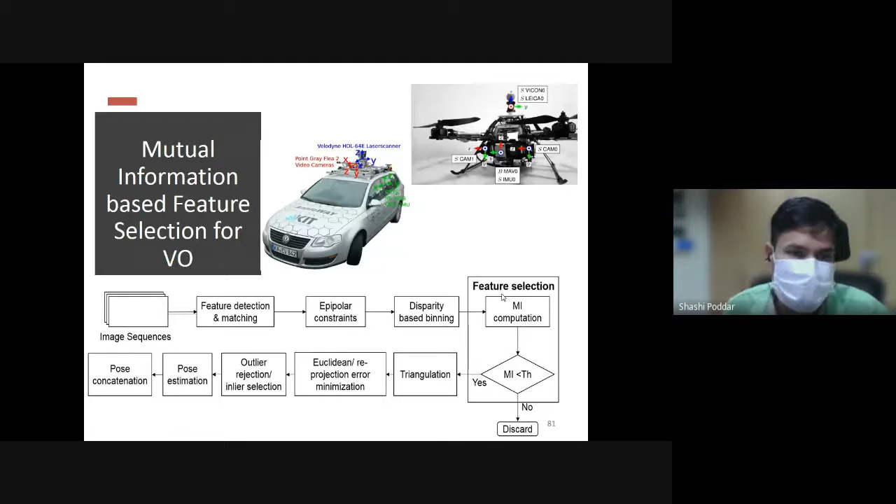The hypothesis here was that can we reduce the number of features and still achieve the same accuracy? So we applied mutual information, computed across different features. Once computed, we realized several features belonged to the same headlight area, the same region of the image, so why keep them if they yield the same information? By reducing the number of features, accuracy achieved was similar, while the time taken was reduced.

This was also published in the Journal of Intelligent and Robotic Systems, Springer, recently. This work was done in 2020, I guess.

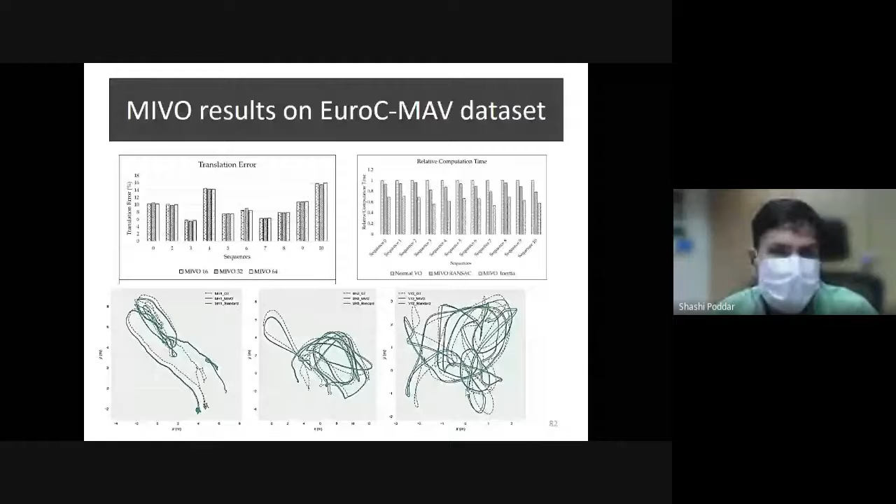Currently we are working on a vision plus inertial navigation system, combining both. In this case, our Kalman filter will have camera states and also the states from the inertial sensors, combining them together to estimate better pose estimates.

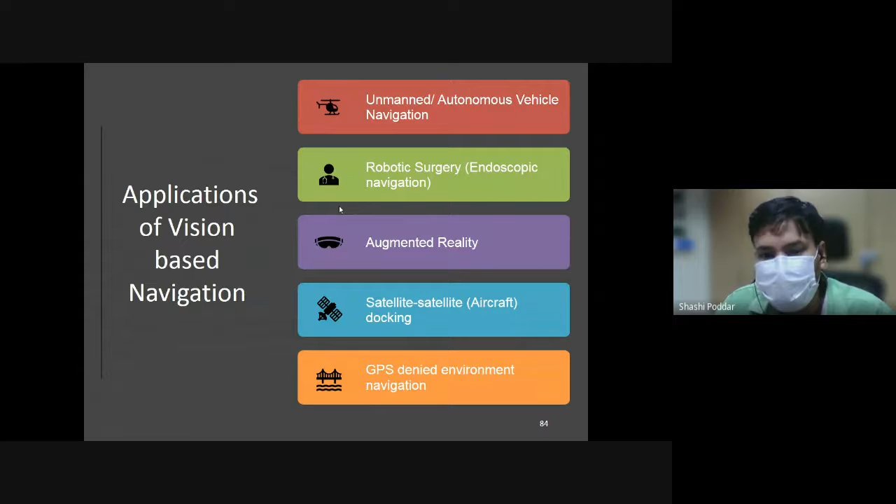This is also the base framework for SLAM kind of systems, simultaneous localization and mapping. These kinds of systems have applications in unmanned vehicle navigation, robotic surgery, augmented reality, satellite-to-satellite docking, and GPS-denied environment navigation.

So with this, I come to the theoretical end of my presentation. But if you have some queries, we can discuss that.